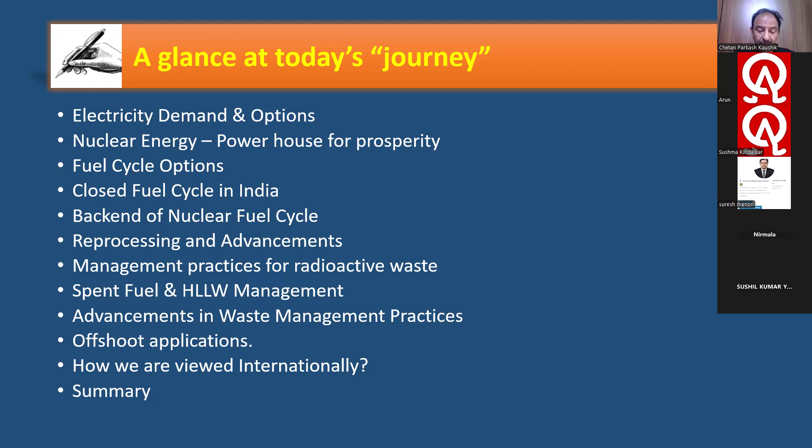I will also cover the important offshoot applications of this development, and more importantly, how this development—done only maybe a decade earlier—has led the international scientific community to view our country with respect to these developments. And then I may summarize.

If you look at an imaginary situation, looking at the world from the sky or from space, you will find that some parts of the Earth are brighter compared to others—maybe the USA, Europe, Japan, and to some extent India. What I'm talking about is basically per-person consumption of electricity, which is by and large a direct measure of the development index as a whole.

Even now, worldwide, we may be lucky enough to be staying in cities, but still a good number—13% of the world population, and even around 15% of the Indian population—has yet to see the benefits of electricity. This shows that electricity plays an important role in the sustainable development journey.

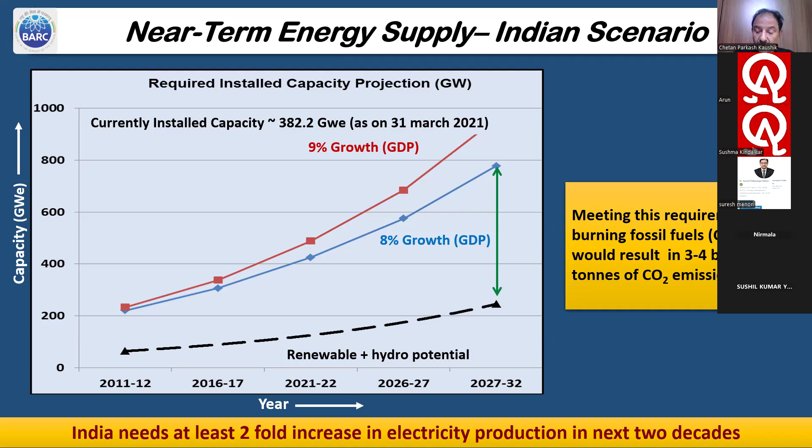What I'm essentially trying to say is that only renewable, only solar and hydro, will not be able to meet the ever increasing demands of electricity. Does this gap, shown by the green line, mean coal will continue to play an important role in meeting this requirement? If we have to bank on burning fossil fuels, not necessarily coal but even oil, it would essentially mean 3 to 4 billion tons of CO2 will again get pumped into the environment. So we have to think about how these things can be handled.

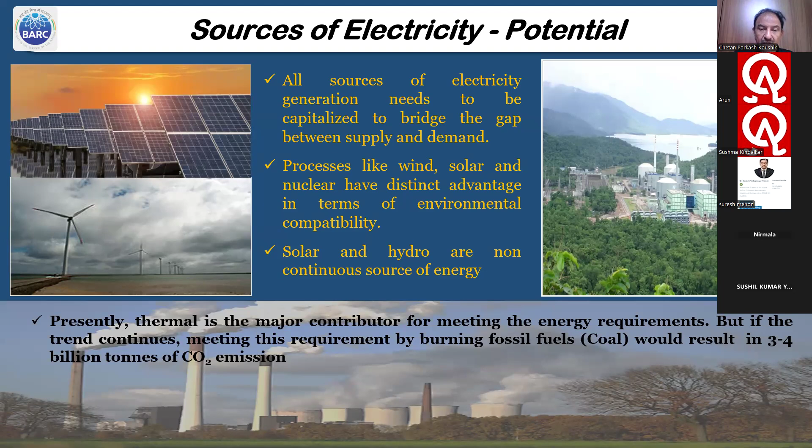Now if you look at the remaining sources, as I told you, solar is on the left-hand side, then I'm talking about the nuclear part, and at the bottom we are talking about coal. So the major contributor as of now is coal, and almost every now and then we've been having a good concentration of CO2 getting pumped into the atmosphere.

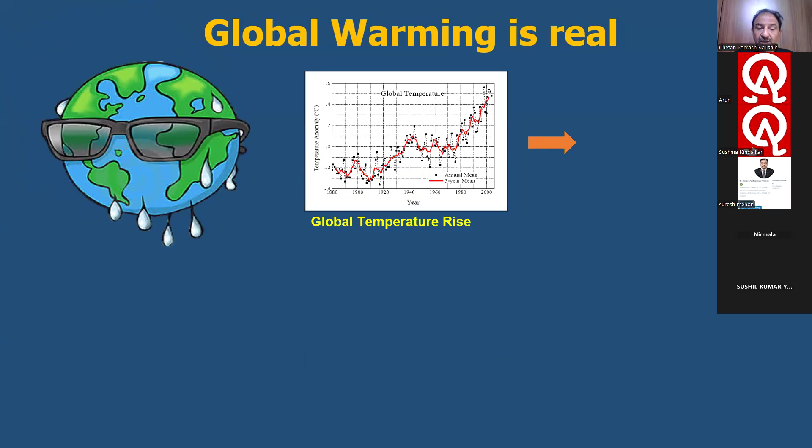So why are we so worried about CO2 getting pumped into the atmosphere because of global warming, and what does it mean? Is it only of academic interest, or are we able to see visible changes from this global warming? It is not only a virtual concern, rather it is now a real scenario, and it has started showing its signature in different ways. For example, floods in North India, typhoons in China, hurricanes like Dorian - there are many such examples, and essentially CO2 is playing an important role in warming the earth.

If you look at the first graph, global temperature, starting from the industrial revolution, maybe around 1900 onwards - earlier we had a green revolution based on crops, and then we started the green industrial revolution. At that time, we were banking only on coal. From 1900 to now, the graph clearly indicates there has been a steep rise of maybe around 1.5 degrees Celsius in the temperature of the earth.

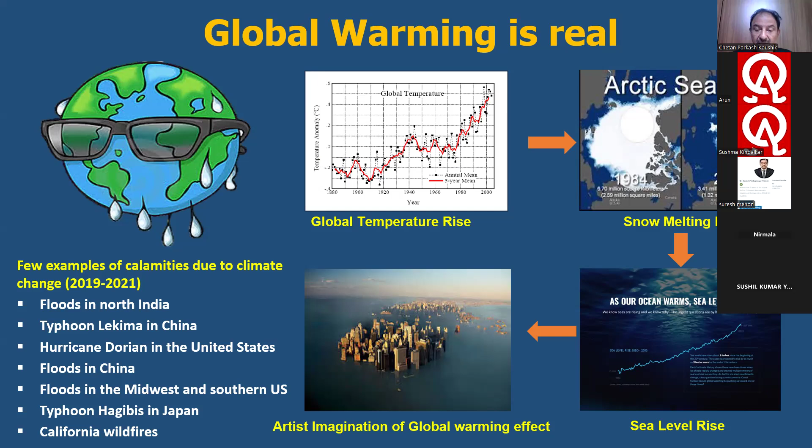Looking at it, the figure 1.5 may not seem that serious, but it has serious consequences, resulting in the melting of ice in glaciers, sea level changes, and sea levels rising up, which will eventually cause coastal cities and areas to get submerged in water.

Now, if you look at the air composition - nothing nuclear so far - it essentially contains nitrogen and oxygen. Nitrogen and oxygen together probably cover more than 90%. The remainder is only water vapor, carbon dioxide, and methane. The question then comes: when the bulk, more than 95% or 99%, is fine, why do we need to bother about the remaining 1%?

Is the presence of even 1% also a cause of concern? CO2 and methane, mainly CO2, are called greenhouse gases - why them and not others?

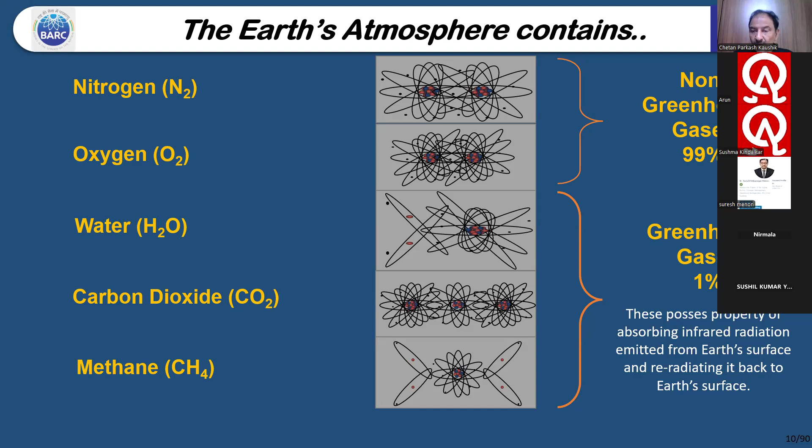If you look at the composition of CO2, this property of absorbing is important. We know that the sun emits different radiations of different energies, and energy and wavelength are the characteristic properties that define radiations.

Radiations of different energy range from ultraviolet to infrared. Nitrogen and oxygen are almost silent players when radiation comes, but CO2 absorbs the infrared radiation from the sun, because the energy of infrared radiation is sufficient to interact with CO2.

Now the question comes - why? It's still basic science, nothing nuclear. Why do nitrogen and oxygen remain silent with infrared radiation, why are they not absorbing it?

There has to be a change in dipole moment - this is again basic science. CO2 is IR active, meaning it interacts with infrared radiation. As a result, when radiation comes from the sun and gets absorbed, and again after reflecting from the earth when it goes back up, it again finds its friend CO2 and gets absorbed again. As a result, it warms the earth's temperature.

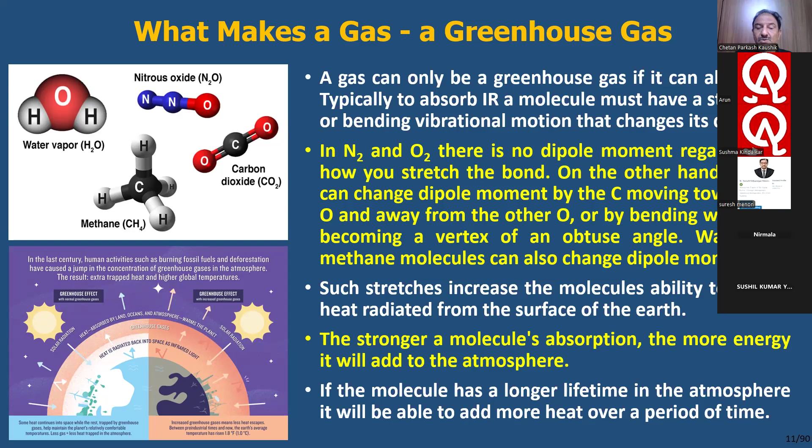Oxygen is almost not playing any role, neither is N2 or O2, but CO2, methane, and water vapor are able to react with infrared radiation and get involved in chemical changes. But N2 has no dipole moment, so it remains a silent player in this.

Now, the greenhouse gases cause global warming. Sun rays come and meet other constituents of air, but there are silent constituents like O2 and N2. The moment these radiations meet CO2, they get absorbed. And when the earth reflects them back, again they get absorbed because of the presence of CO2.

Around 1900, if you look at the data, the average concentration of CO2 was something around 150 to 200 ppm. If you look at current data from Google and others, we have touched around 400 ppm. Now, CO2 is important for a habitable planet.

Let's imagine a situation where CO2 was not there, where CO2 would have been zero. That would mean the temperature of the earth would have become minus 20 or so - meaning human civilization would not have existed. So CO2 is equally important.

But as our elders have told us, excess of everything is bad. So now 200 ppm has gone to 400 ppm, which has started showing its results. Modeling data predicts that if no serious attempt is made to stop this, the consequences will be even more serious in nature.

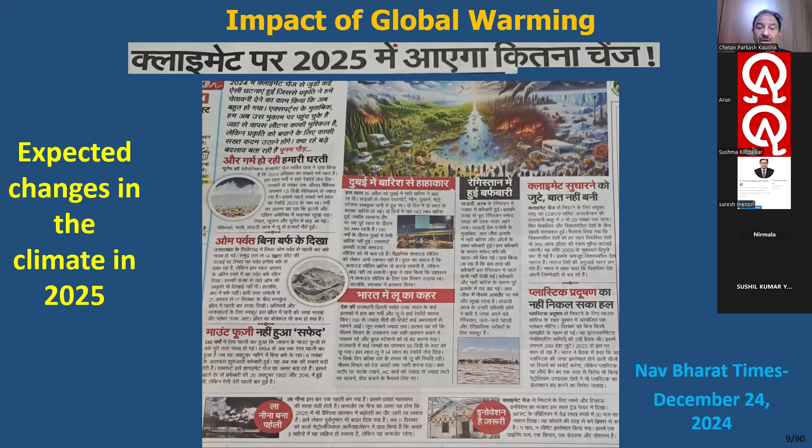That means scientific observation has sensitized the public and policy makers to look seriously at something. Look at a key reason why nuclear energy is a game changer in the fight against climate change: it has a low carbon footprint.

Now let's look at the footprint, starting with coal. If we use 1 kilowatt hour, 1 unit of electricity, we release around 820 grams of CO2 into the atmosphere. Then there's natural gas, solar, and nuclear, which has only around 12 grams. This shows nuclear has a minimal footprint, by and large equivalent to renewable energy options.

So the question comes, when we talk about nuclear, what do we mean, what do we understand? Because one strange or unique thing happened with nuclear that hasn't happened with anything else: when the process of nuclear fission was invented in 1939 by Strassmann and Hahn, the scientists, they started exploring this.

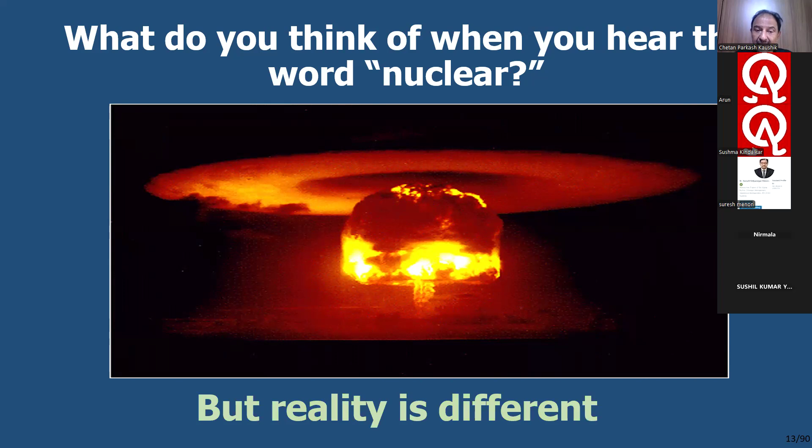The truth is different. There have been conferences of parties because scientists have done their job. They sensitized policymakers about CO2 increasing in the atmosphere, and that if nothing is done seriously, it will have serious consequences.

Because of that, policymakers around the globe have realized the sensitivity and seriousness of this, and a worldwide yearly conference is held, because these gases and CO2 do not know any boundary. Hindustan, Pakistan, USA, our God has given the same sky to all of us. So globally, it has to be addressed.

Because of that, and they meet yearly, that's what I was trying to tell you, that our honorable Prime Minister has given a commitment that we'll have net zero carbon emissions by 2070, together for our planet.

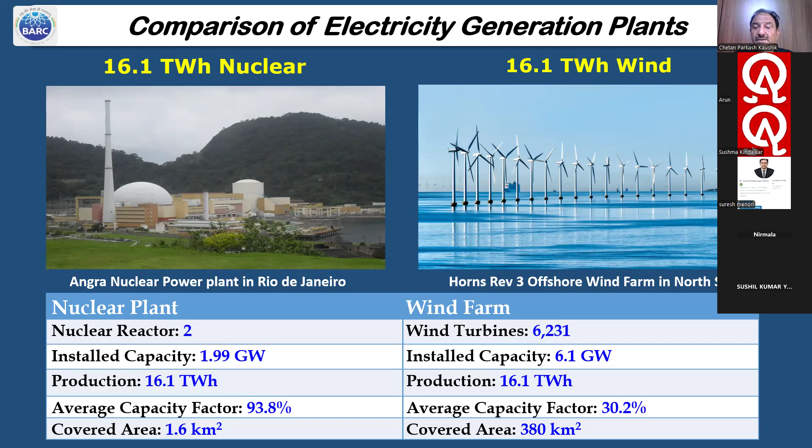So this area looks to be very, very high.

Now, nuclear is playing a key role as of now, an indispensable role in health sector, food, water, environment, national security, technology development, and industry. I can give examples for all, and some of these I will cover during the course of the presentation.

Now let's look at how this atom can become a source of energy. This goes back to a paper published, if my memory is right, in 1905, by one of our scientists, the father of this field, Albert Einstein, where he indicated E equals mc square. That paper, published in 1905, becomes the basis of nuclear energy, and it indicated that mass and energy are interconvertible.

To give an example so one can really appreciate this powerhouse of energy: if you look at maybe 2 bundles of uranium fuel, 27 kg each, the energy equivalent would require a huge amount of coal, equivalent to 700 tons. This itself reflects what we mean by the powerhouse of energy.

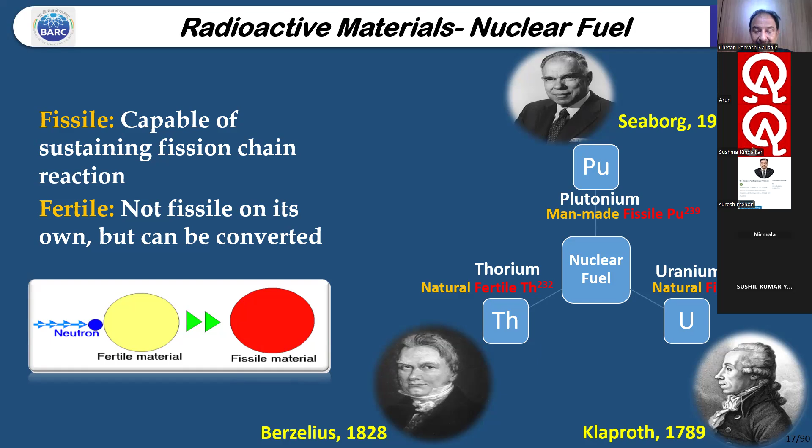Coming back to the Indian part, we made Apsara, the name of the reactor, in 1956, and we were first in Asia at that time. This was the vision of Dr. Homi Jahangir Bhabha, who is known as the architect of the nuclear energy program in our country. He is the founder of India's nuclear program and made the first reactor operational in 1956, being first in Asia, because he knew nuclear would be important not only for electricity production with very low carbon emission, but also for health, food, cutting edge science and technology, and national security.

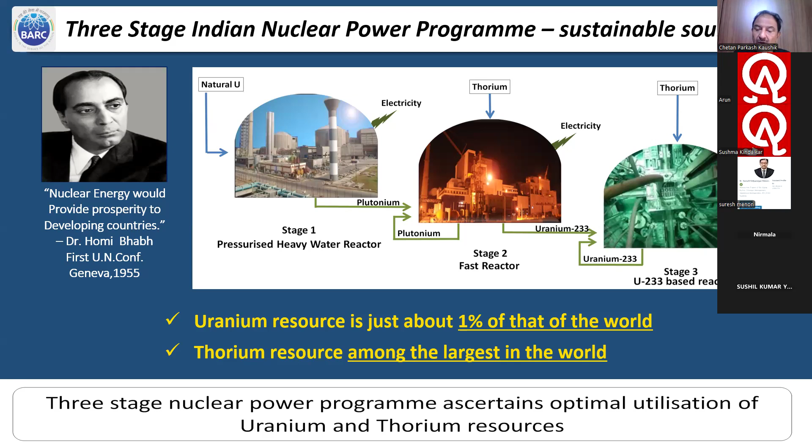During fission, what happens is a heavy nucleus gets split up into two or more smaller nuclei, plus a huge amount of energy, plus additional neutrons. This huge energy has to be extracted, so here we use water to extract that energy. Water gets converted into steam, and we increase the pressure so that the boiling point of water can be increased - again, we are playing with basic science.

So, pressure cooker principle - why? Compared to a normal conventional pressure cooker, where boiling temperature of water is around 130 degrees Celsius, here it's much more because pressure is higher, and it's the high pressure steam which rotates the turbine of the generator, and that's how electricity is produced.

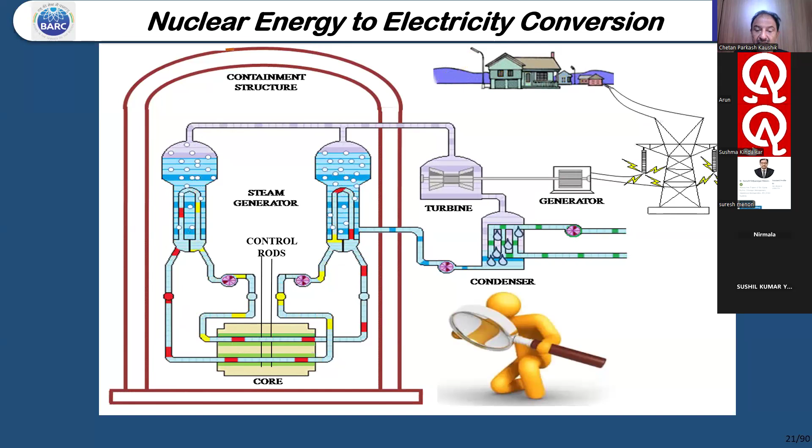This is a simplified part, but this also shows the safety components, and we have what is called defense in depth, or multiple barriers.

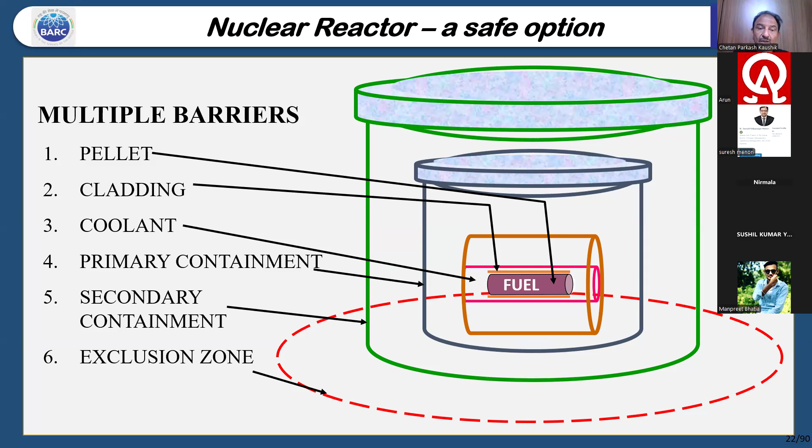Initially, there will be a reactor. You can talk about fuel pellet, and the fuel where it is written. It is a very strong, chemically stable refractory material we call zircaloy, an alloy of zirconium and tin. Then you'll have a cladding material, coolant, primary containment, secondary containment, and then there is the exclusion zone. What I'm trying to tell is we have a defense in depth, a multi-barrier concept to ensure the safety of environment as well as human civilization, while extracting the benefit of science, extracting the energy of the atom. At the same time, we want to make sure that it remains safe.

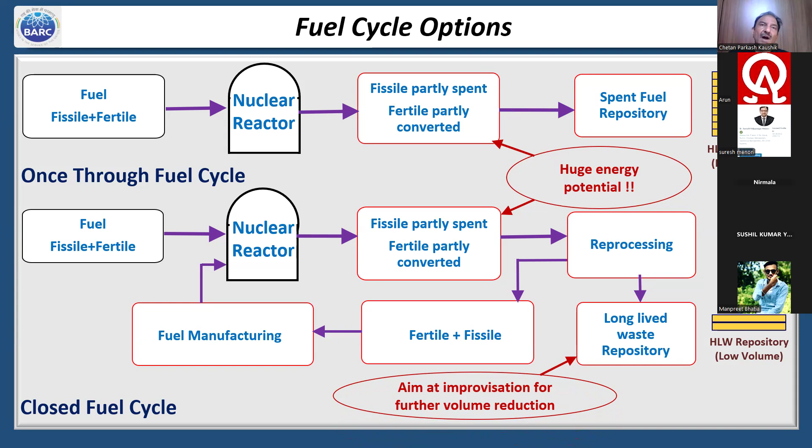Now we talk about the fuel options. All over the world, there have been two types of fuel options. One, we say once-through fuel cycle, where the fuel is taken, put into a reactor, extract the energy, and the spent fuel, which contains plutonium and a balanced amount of uranium-235, they just store it. Worldwide, they have a planning to put it underground, maybe something around 500 to 800 meters below the earth. They call this a geological disposal facility.

So it is being reprocessed in India to recover plutonium which got formed in the reactor, and then the remaining components also are being reused for different applications. So India adopted a closed fuel cycle. Again, I want to repeat: take a fresh fuel, put into the reactor, then the spent fuel. Now the fresh fuel I can handle in my bare hand, no problem.

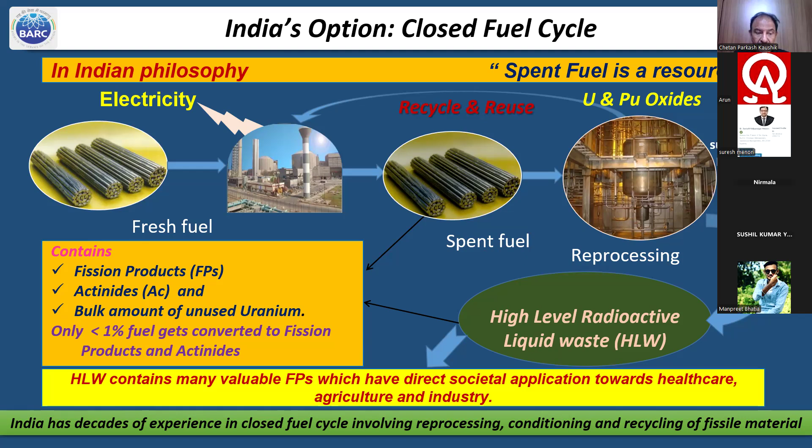So when you say front end and back end, that means there has to be some front end also. Front end starts right from taking uranium from Mother Earth, converting and dressing it in a fuel form, then putting a clad and putting it into a reactor. So that part comes as the front end part. But the back end means once it comes out from the nuclear reactor, when it gets consumed, and that time India has gone for a closed fuel cycle.

So it makes two components. One is the reprocessing, where plutonium and uranium are recovered for reuse — recycle and reuse. The reasons have been many: conservation of natural resources, optimization of waste management system, minimization of environmental impact, and most important, which has kept our country in the driver's seat, that fuel cycle components like cesium-137, strontium-90, yttrium-90, ruthenium-106 were once upon a time waste components, and we all, including globally, worried about disposing of them again into Mother Earth.

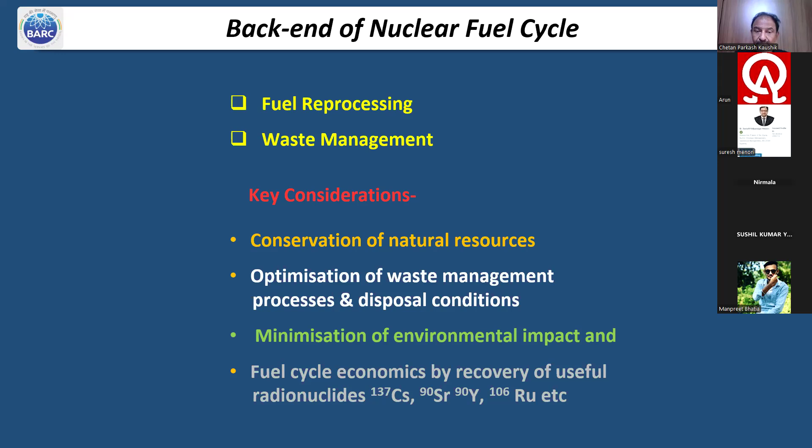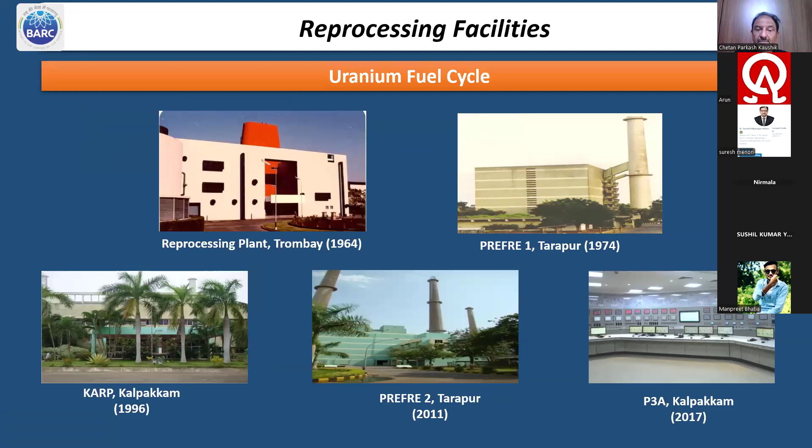So this is a reprocessing methodology. I may just skip details because of the complications or complex nature of the process. These are some examples where we have a reprocessing plant in the country, and this is the process of how we reprocess the fuel. It is initially cut, the zircaloy is cut, it is dissolved, and then we play with the valencies of uranium and plutonium, and then go for what is called a solvent extraction system.

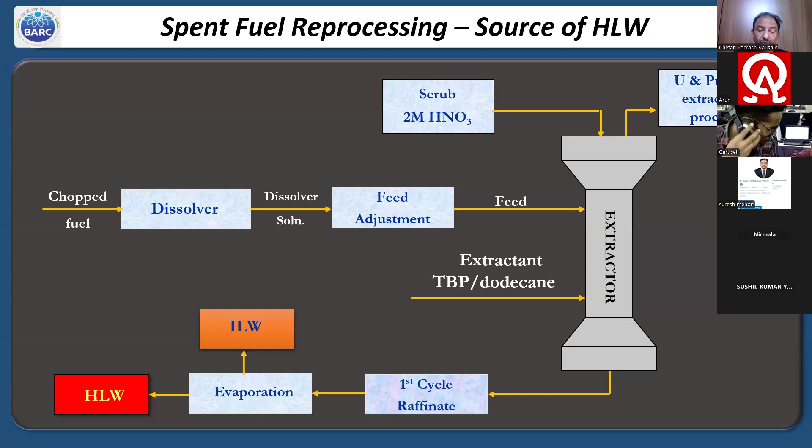What I'm trying to tell you is that it's an innovative technology where only uranium and plutonium are taken out, keeping the remainder. Then uranium and Pu are separated from each other and used as fuel for future reactors.

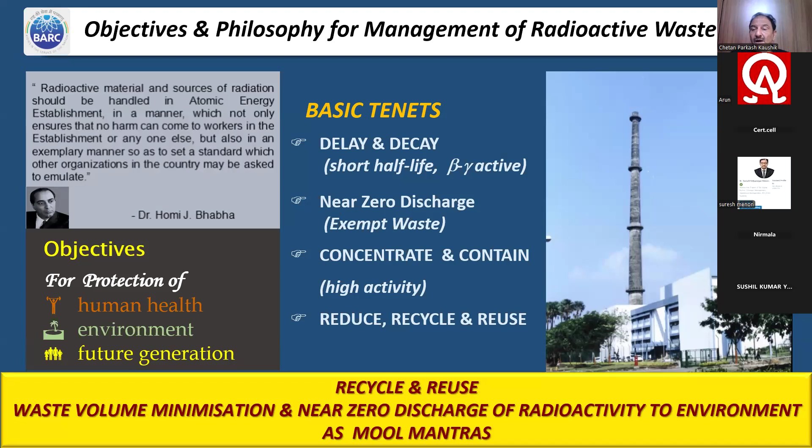So from Bhabha, right from the inception of the nuclear energy program in the country, most important attention has been given to radioactive waste - recycle and reuse, number one, and zero discharge of radioactivity to the environment has been the mool mantra right from Bhabha, who has been the architect of the nuclear energy program in the country. So again, uranium and plutonium have been taken out from reprocessing.

Another plant is the waste management plant, where there were two options. One is to convert it into glass, that is immobilize it, and then dispose it off. But the innovation has gone further - is it possible to recover them individually, like cesium-137, strontium-90, ruthenium-106?

Similarly, for TRU, that is transuranics - neptunium, americium, curium - these are all called actinides. You might remember from our high school periodic table, at the bottom there are two lines. One is called lanthanides, one is called actinides.

So americium is an alpha emitter. You may know the radiations are either alpha, beta, or gamma - they have different properties and nature. Americium-241, when I say 241, that's nothing but the mass number, which is the sum of protons plus neutrons in the nucleus. And this americium-241 is an alpha emitter.

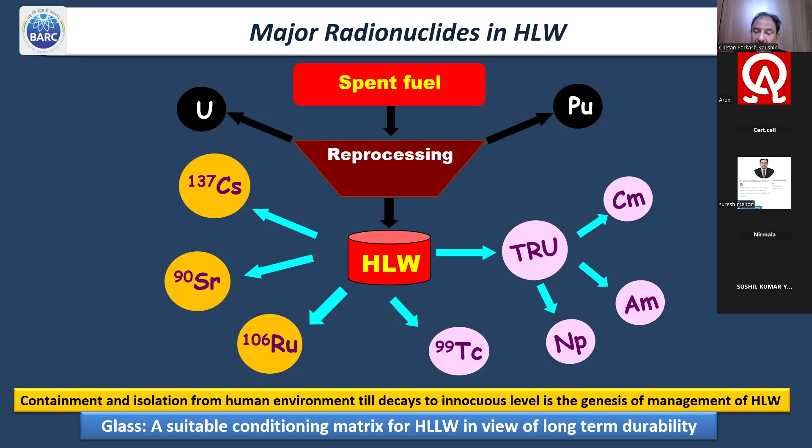And the 12th class principle, normally we read what is called the Seebeck effect. So we utilize this, and americium-241 is equally important.

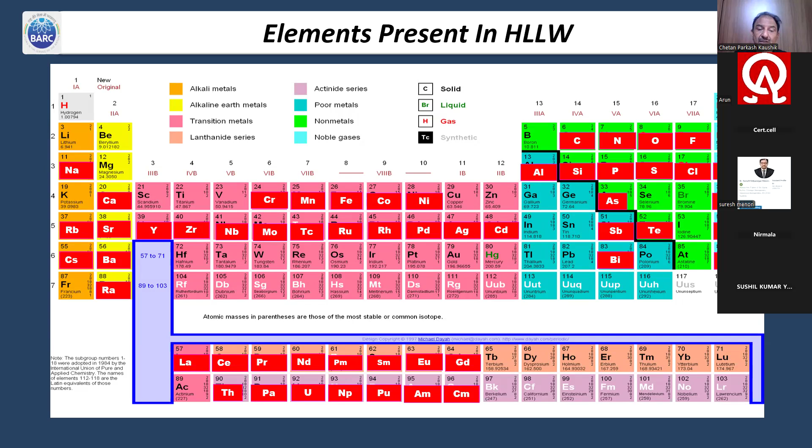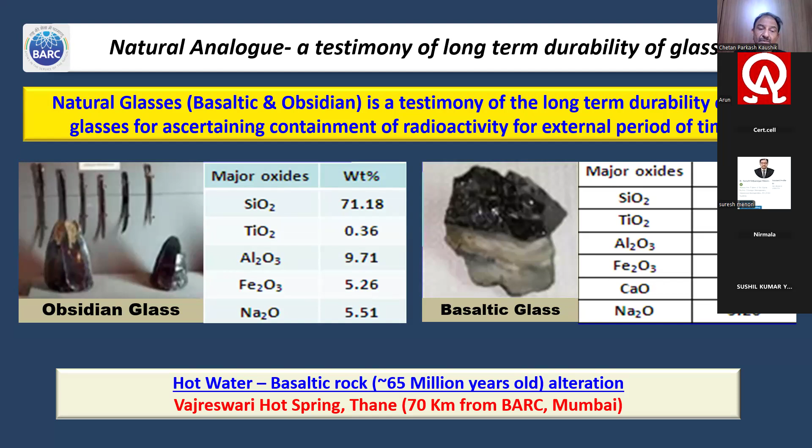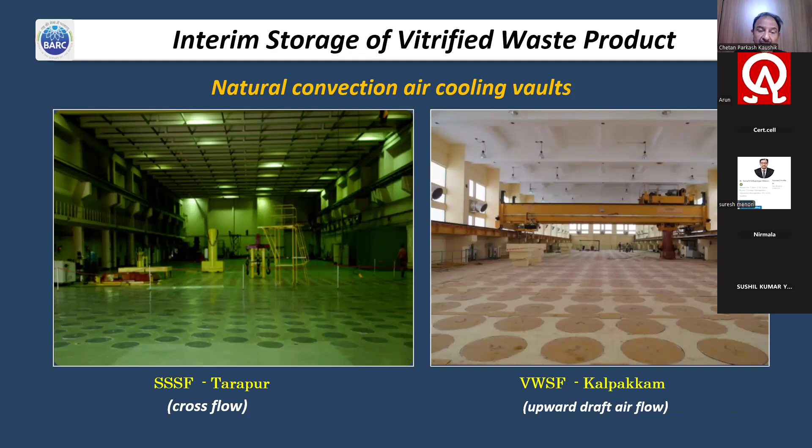These are storage facilities where after the waste is put, it is converted into glass. The radionuclides generate heat, so we have to dissipate it. They are stored for around 30 years so that heat is dissipated, and when they decay to an innocuous level, meaning activity becomes very low, they are disposed of around 500 meters below the earth. This is the international level practice for disposal of waste.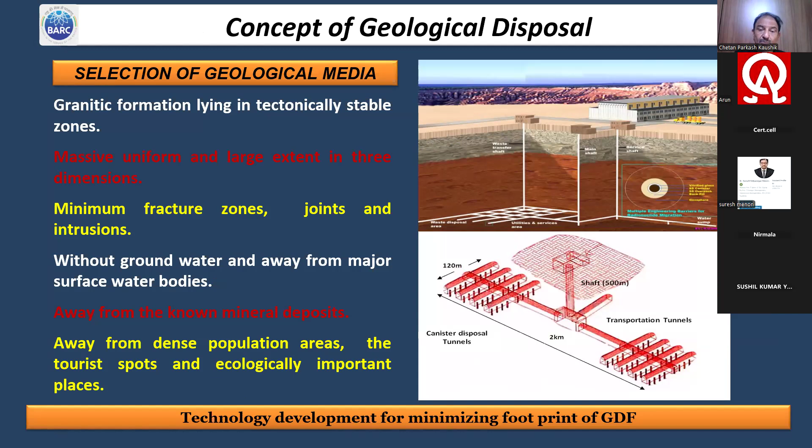But now look at the scenario of India, and what India has done which has put it into the leader's scale. I'm intentionally skipping this part. Look at this slide, why and what India did to get into the driver's seat.

See, if the waste is left as it is, with nothing done to it, the radioactivity will take more than 1 lakh years to come up to the natural uranium level. I mention natural uranium because it already exists in nature, and human civilization has been existing alongside it. So if the waste after the reactor takes such a long time for activity to come down to the level of natural uranium, one cannot really wait that long. You have to remove the long-lived components.

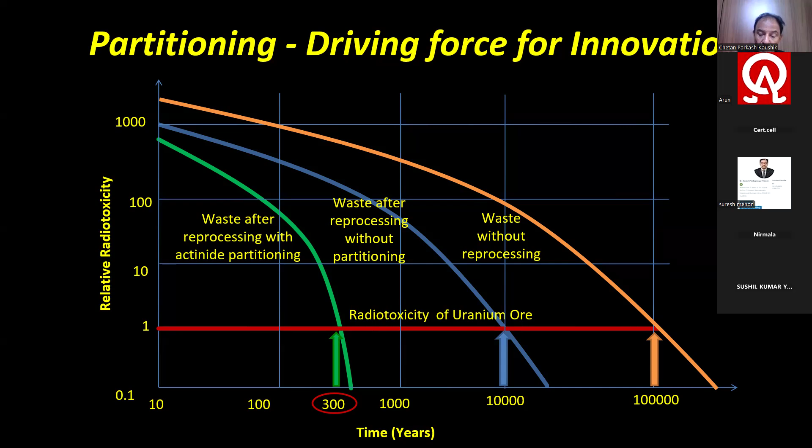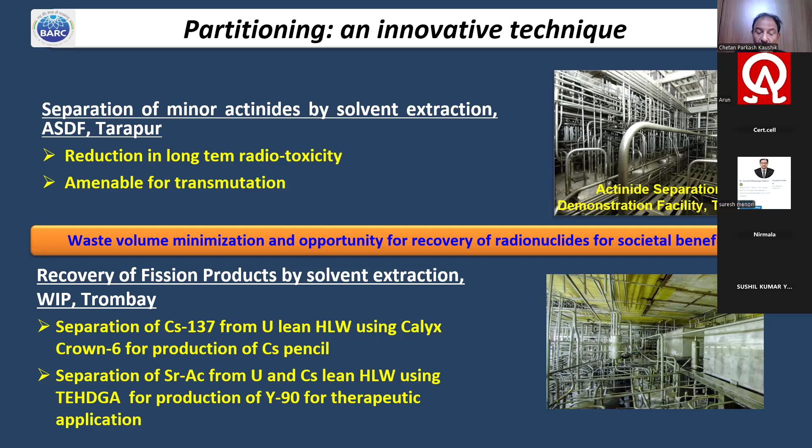This is what was done, and here you see the picture in Trombay. We recovered actinides, americium-241 part, americium, cesium-137, and strontium. Those components which were considered as waste, needing to be converted into glass and then stored and taken for disposal, are now recovered and utilized for different societal applications.

And how to recover? It has to be selectively recovered, and that calls for chemistry and engineering development. So we work in a development, demonstration, and deployment mode.

So what I'm trying to tell you is that waste is not waste, it is a resource material. Cesium-137 and strontium-90, if recovered, make up 90% of the radioactivity of the waste. And ruthenium is again 1 to 2% of the radioactivity. So if all of these have been recovered in India, they have been deployed for different societal applications.

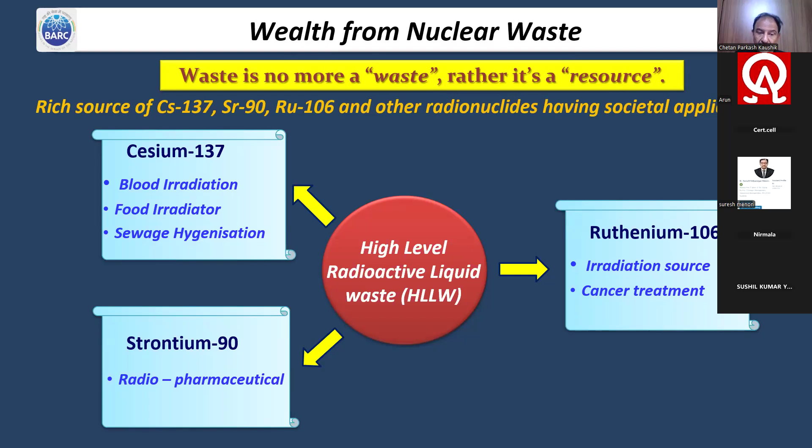For example, we recovered cesium-137 from waste, and this was converted into a glass pencil, which is being used as a blood irradiator. As of now, more than 20 hospitals use this cesium-137, recovered from waste and converted into a cesium glass pencil, as a blood irradiator.

And you know where this blood irradiator is used? For transfusion, if an immunodeficient patient has to be given blood, that blood needs to be made free from all harmful components. So radiation is given so that all harmful organisms are killed, and that is done by blood irradiators. Our country was first in the world where cesium-137, a component of waste, was recovered in large quantity and deployed in a non-dispersible form for various societal applications.

Similarly, ruthenium-106, again one of the components of radioactive waste, was recovered and is now being used for eye cancer treatment. Let me tell you, there was only one company in the world, Messrs. BEBIG, Germany, a radio pharmaceutical company, that was selling this to all the remaining parts of the world at a very heavy cost, keeping eye cancer treatment away from the common man in India.

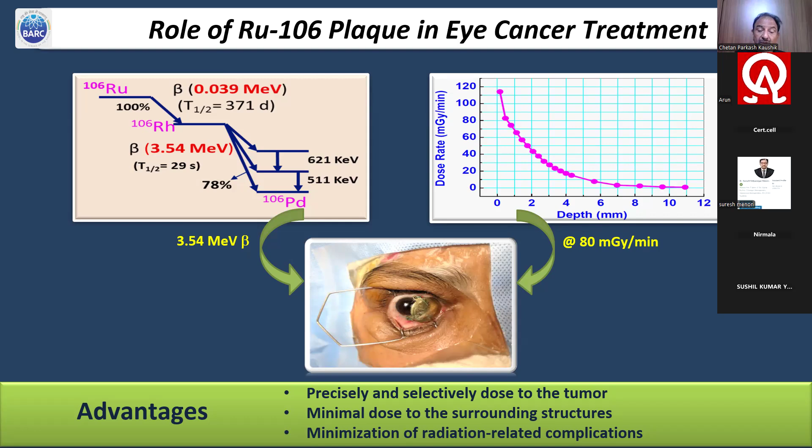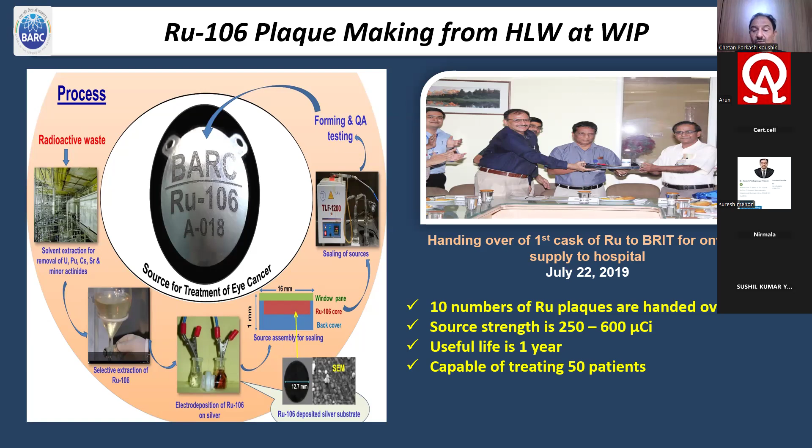On the left side, I was director there. When we gave the first lot in July 2019 for ruthenium after recovering it from waste, we look at this example taken from one of the Sankara Eye Hospitals in Bangalore, showing how eye cancer treatment is done using ruthenium, a waste component.

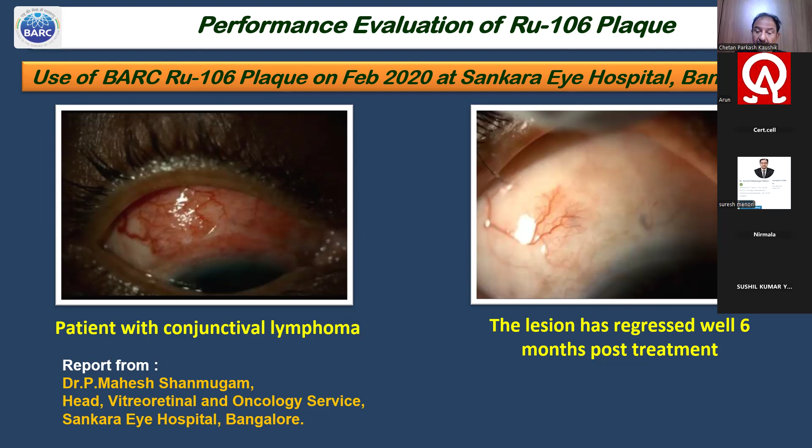The beta energy in this case: ruthenium-106 decays to rhodium-106, which has a beta energy of 3.5 MeV, and beta energy being short range, we wanted to kill only the cancerous cells without destroying the healthy cells. So we utilize the beta energy coming from rhodium-106, and the cancer cells are directly killed or destroyed, as shown in the right-hand side picture.

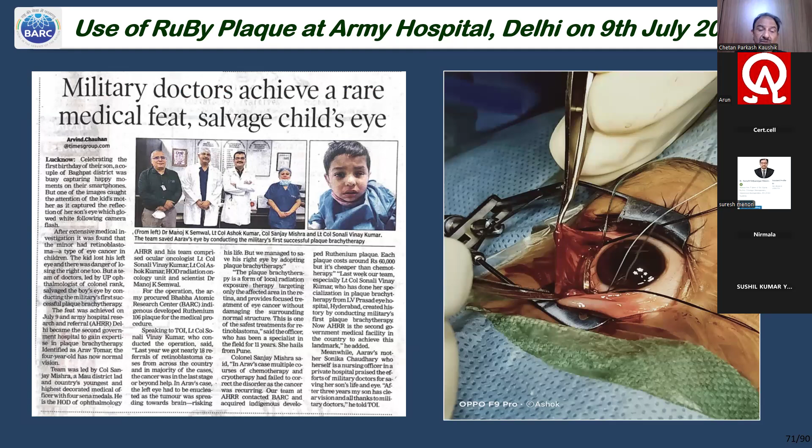On 9 July, at the Army Hospital in Delhi, a poor child had eye cancer treatment using the BARC-recovered ruthenium from waste. That plaque was used and the child's vision was salvaged. This is the certificate given by AIIMS Delhi stating that what they previously imported, this is as good as or even better. Following the path of Atmanirbhar Bharat, we have a 1 minute video clip showing the same.

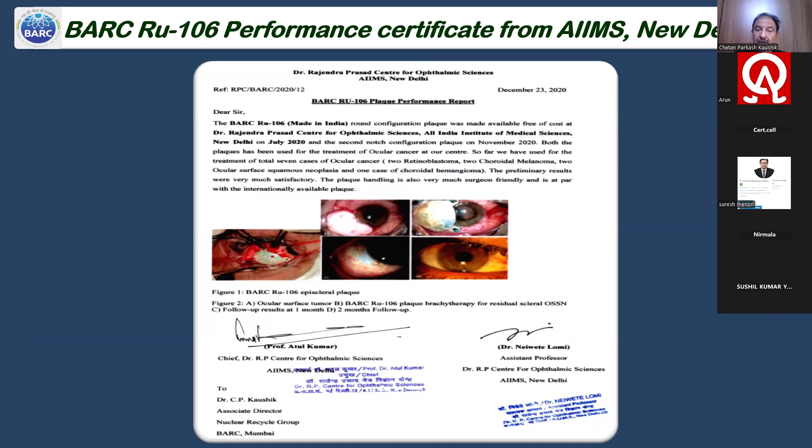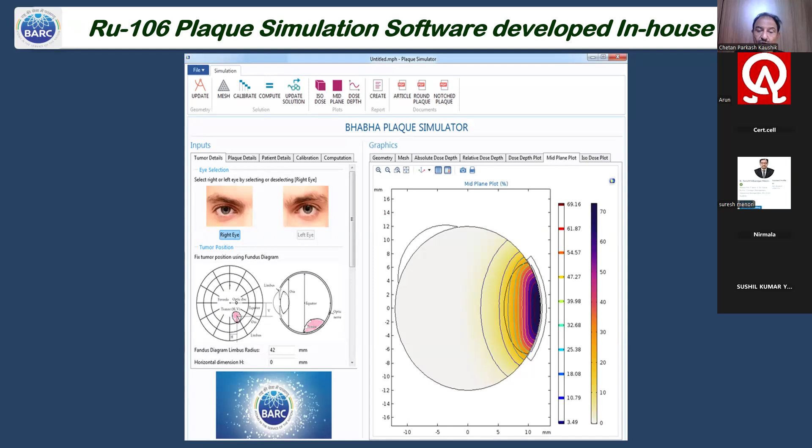We made a software program so that doctors can see, depending on the magnitude or severity of the tumor, how much time the radiation has to be applied to the eye to ensure all tumors are eliminated. Now the video clip, for 1 minute.

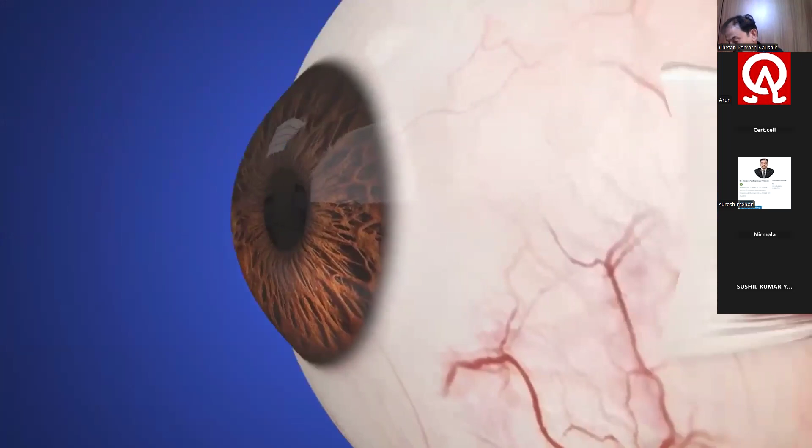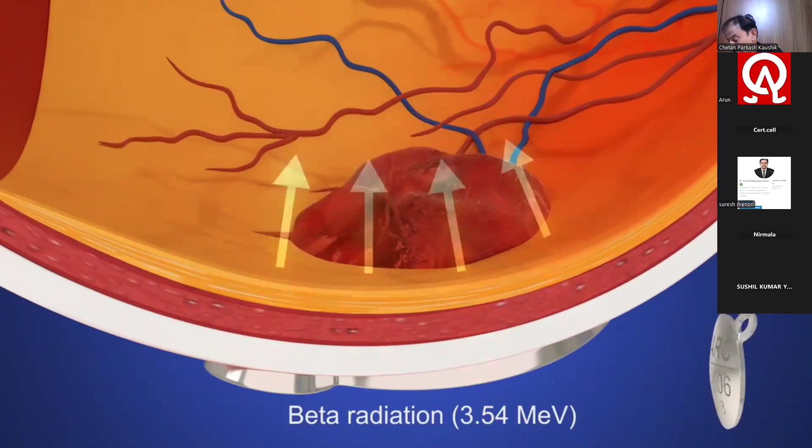Bhabha Atomic Research Center, the premier R&D center of DAE, is engaged in developing technologies using radiation for healthcare applications and treatment of cancer. BARC has indigenously developed ruthenium brachytherapy (RUBY) plaques for eye cancer treatment. Ruthenium brachytherapy is being used globally for treatment of eye cancer. In this treatment, a ruthenium plaque is placed on top of the tumor. It delivers selective radiation dose to the tumor without damaging the healthy tissues of the eye. This treatment modality is safe and has a very good track record of vision recovery and eye salvage.

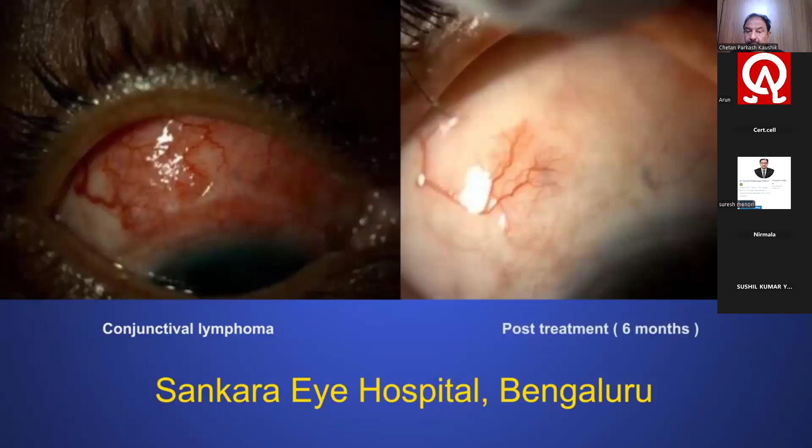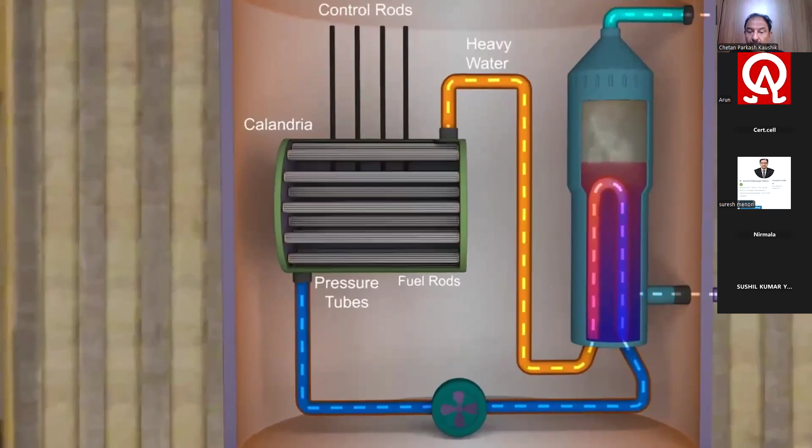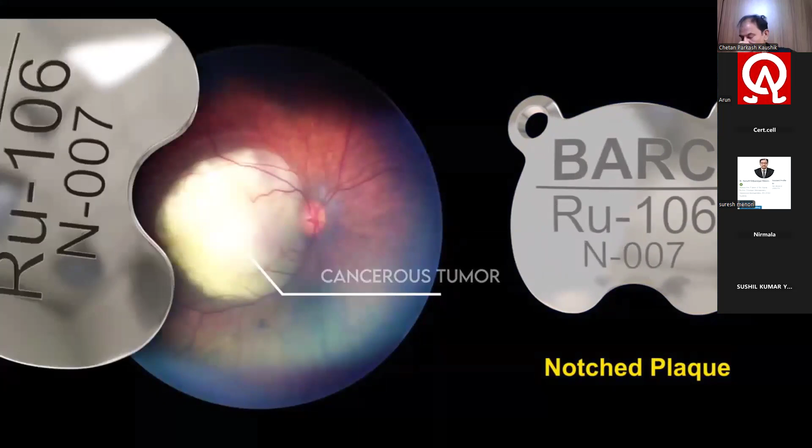Ruthenium plaque contains ruthenium-106 radioisotope. It is produced in a nuclear reactor by fission of uranium-235. This fission byproduct from spent fuel is harvested in its purest form using a series of separation processes. The recovered ruthenium is further electro-deposited on a silver disc, which is sealed and formed to produce the ruthenium plaque. Ruthenium plaques of round and notched configurations are being produced for the treatment of eye cancers. The notched configuration is suitable for treatment of eye cancers located adjacent to the optic nerve.

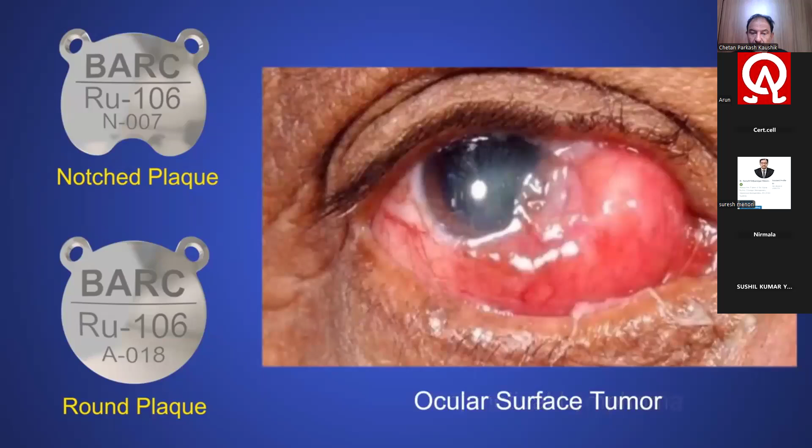The notched and round plaques are used for treating eye cancer like uveal melanoma, conjunctival lymphoma, ocular surface tumors, retinoblastoma, etc. Complementing the Ru-106 plaques, BARC has also developed plaque simulation software to assist doctors with optimal treatment planning. The software provides an easy-to-use interface for calibration and dose rate distribution of the Ru-106 plaques. It predicts treatment duration and dose received by other healthy parts of the eye.

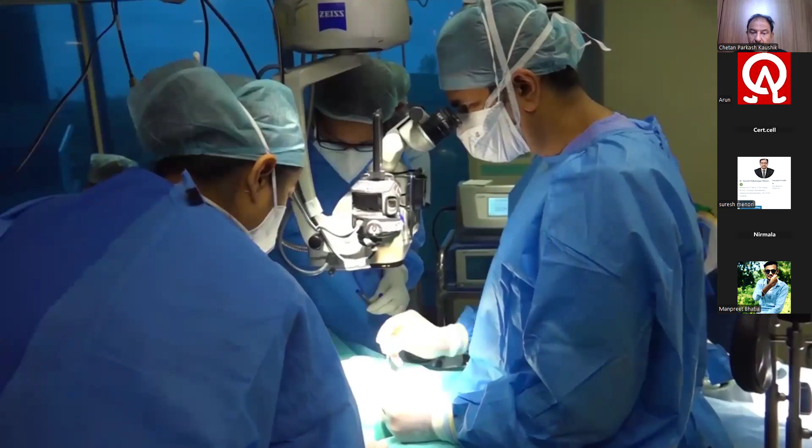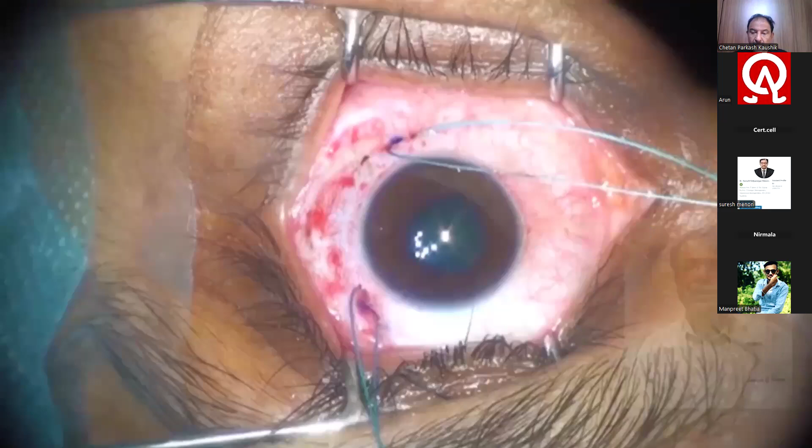Ruthenium plaques are being used for eye cancer treatment at several hospitals in India, including Center for Sight Hospital, Hyderabad, RP Center AIIMS Delhi, Sankara Eye Hospital Bengaluru, Army Hospital Delhi, Hinduja Hospital Mumbai, and Fortis Hospital Gurugram, Haryana. More and more hospitals are progressively adopting ruthenium plaques for better and cost-effective treatment of eye cancer. These plaques have gained the trust of doctors and patients alike. Development of an indigenous ruthenium plaque by BARC will really revolutionize the management of eye cancers in India and this part of the world.

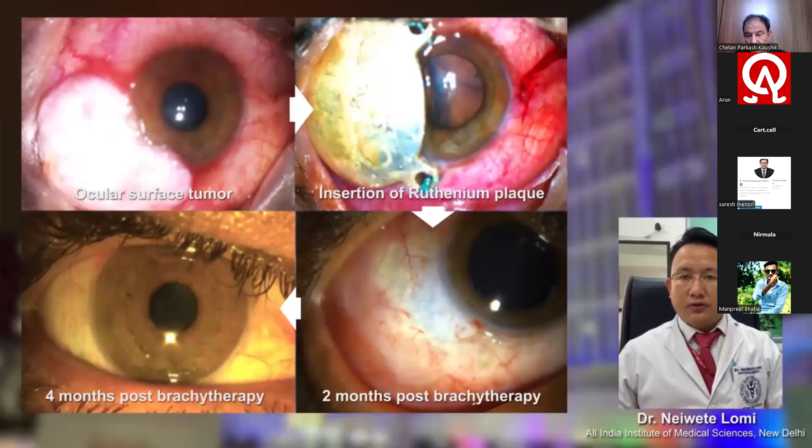We at Dr. RP Center, All India Institute of Medical Sciences, New Delhi, have been using this BARC Ruthenium-106 ocular plaque for the past 1 year. The results are very satisfying and encouraging. The plaque handling is very much at par with the internationally available Ruthenium-106 plaque.

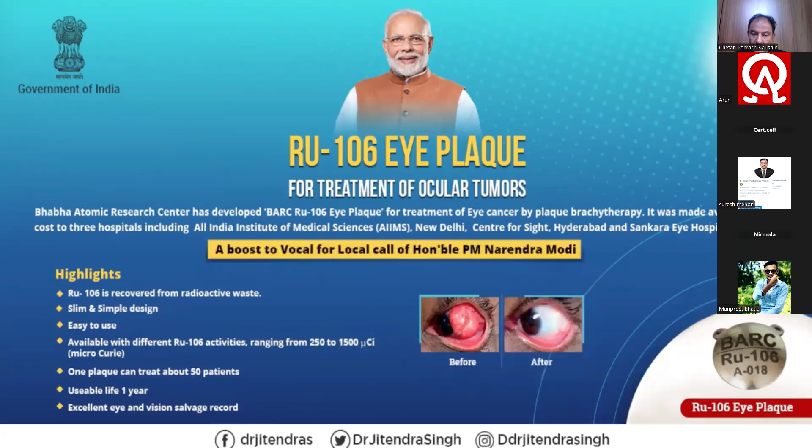BARC is now developing a pediatric plaque for treatment of retinoblastoma and a crescent moon plaque for treatment of cancer near the cornea. Ruthenium plaques are available through the Board of Radiation and Isotope Technology. Indigenous development of ruthenium plaques and the plaque simulator are major breakthroughs in the area of Atmanirbhar healthcare, providing affordable treatment to eye cancer patients in India.

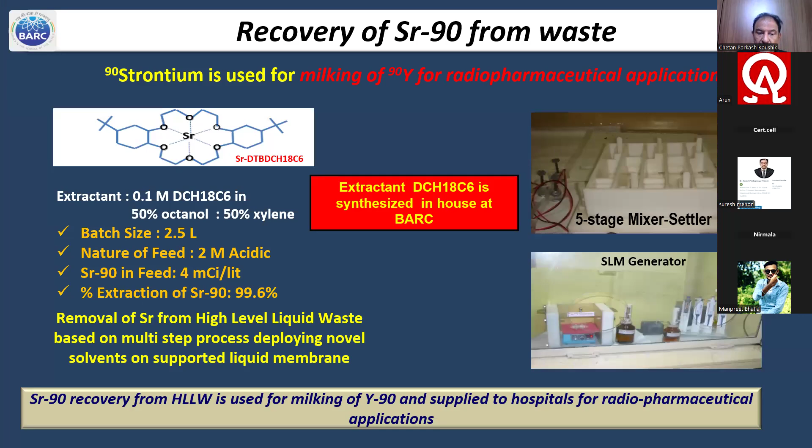So we have seen how this is recovered and being used. Similarly, strontium-90 is also being recovered and used for therapeutic applications. Now, if you remove the useful components, the volume of waste becomes very, very small. So that means it has multiple advantages.

Hindi mein bolte hain, aam ke aam gutliyon ke daam. Extract the energy, produce electricity, and what becomes waste becomes input for the other process. So that's how, as I was saying, it is circular. It gives birth to a circular economy process.

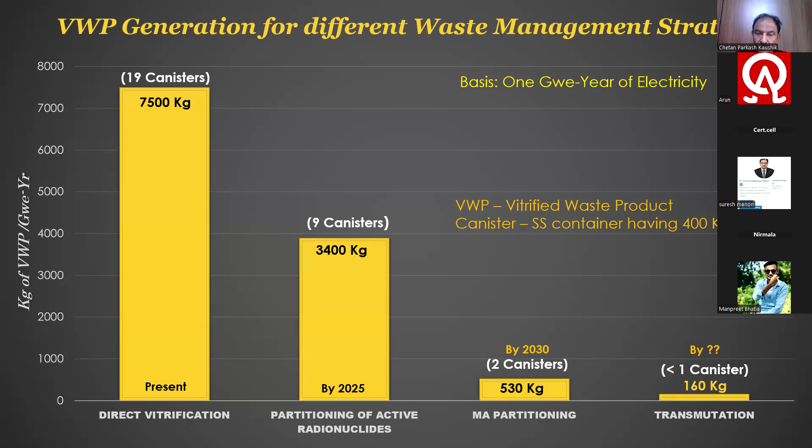So the impact of partitioning, as I'm saying, is the volume of waste becomes very less. The conclusion now may be that this will considerably cut down the requirement of geological disposal facility, that means going to 500-meter depth of the earth to dispose of all the waste. The benefit of science should be taken today. Why should future generations need to worry about it? That means we have to make sure there should not be any disposal facilities needed, and the solid radioactive waste has to become a reactant, an input for the other process. That's how the circular economy comes into picture, and it also makes the overall process economical.

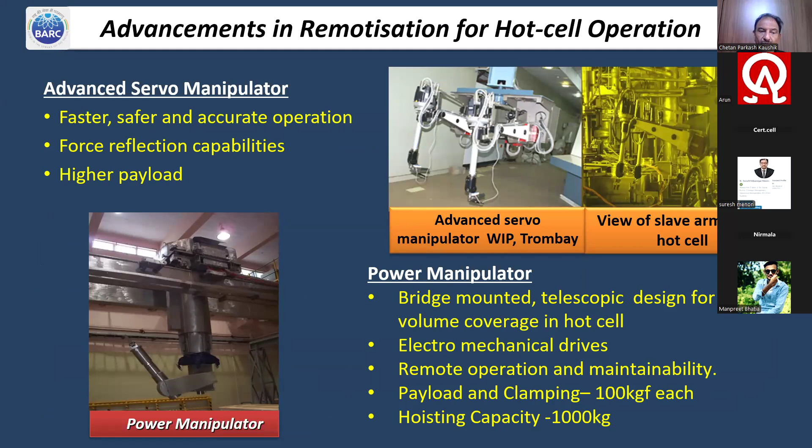This is showing a similar thing, generation of... I think this is more technical in nature. This is what is normally used in hot cells, so that man need not go near the radiation. Robots and all are being used. The intention is that all the required advanced equipment is being used for ensuring safe and secure working.

We have near zero discharge of radioactivity to the environment. We use well-developed processes so that the discharge of radioactivity is zero. That is what is very important for us.

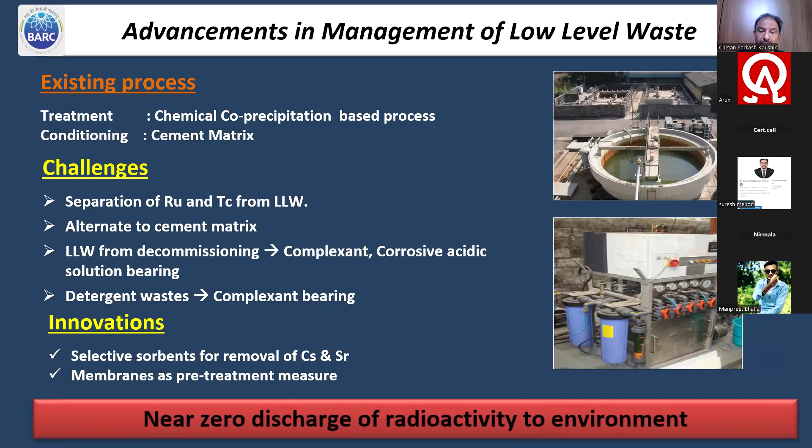But let me tell you, even on your forehead, if I put a sensitive radioactive measurement counter on your head, it will show presence of radioactivity. You know why? Because we all take tea, we all take milk, so potassium-40 comes along with the calcium, and potassium-40 is present in our body. Similarly, radiation also comes from the earth. That means human beings have been existing in an environment of radiation not just from now, but right from mother earth itself. The question is the quantity of the radiation.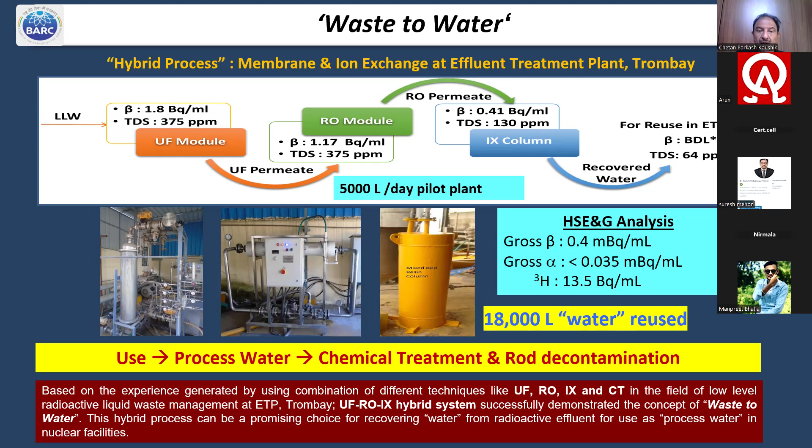This shows that we use advanced chemical processes - ultra filtration modules, reverse osmosis modules, ion exchange modules - and the processed water, when wastewater comes in, is being reused again. Maybe not all, but for low level radioactive waste, the waste gets converted to water, and that water is reused for the plant, which helps minimize water requirement as well.

So this is again how we handle low level waste. Again, the volume is minimized. We use plasma as a source, we use resorcinol formaldehyde, and very small amounts of waste are disposed into nuclear institutional control.

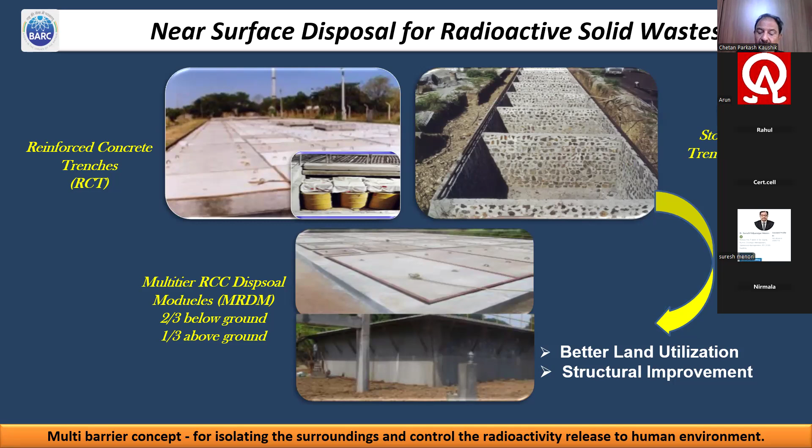And they are decaying. The main difference between chemical waste and nuclear waste is that chemical waste, for example potassium cyanide, remains equally toxic as a function of time - whether you consume it today or after 100 years, the result is the same. But in case of radioactive waste, since it's decaying, today it's waste, tomorrow it may not be. Because of that decay, it becomes an innocuous level. So the short-lived radionuclides are disposed in specially engineered modules within the institutions of DAE, and within a given time period they decay to innocuous levels.

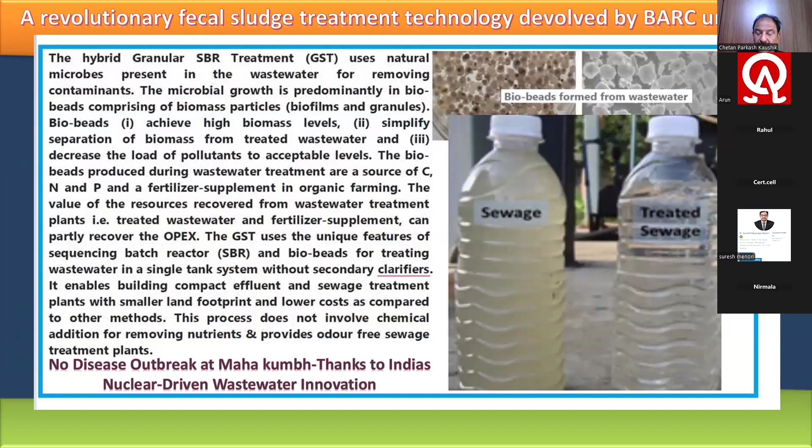Now these are just examples of the engineered structures being used. Now let's look at the offshoot applications - sewage treatment done by radiation is another important application. Now, whatever we have done for development, we also look at whether it has any application in the non-nuclear field as well.

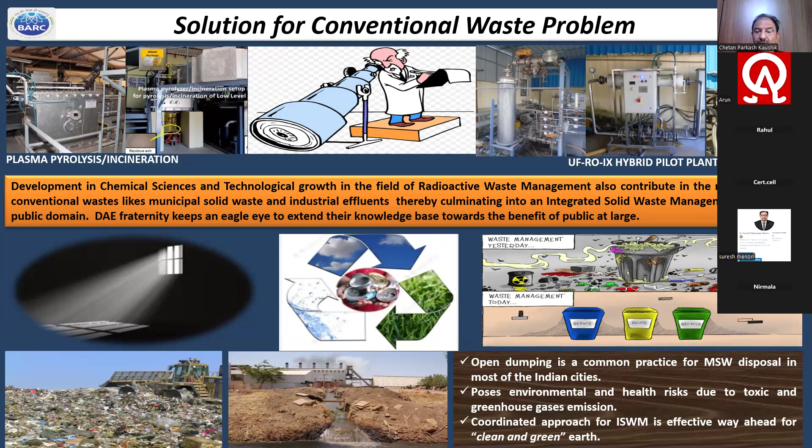If you look at municipal solid waste and liquid waste, I can give an example. This municipal solid waste situation has been the story of all our cities in the country. Although all governments have been trying to have religious adherence to segregation, I would ask all listeners - are we really doing it religiously? Probably there is good scope to improve it further. This picture is from Gazipur in Delhi - almost the heap is close to the height of Qutub Minar, with open dumping and then open burning and all.

I would like to tell you that if you openly burn waste, there are a lot of poisonous gases, which even at very low concentrations below threshold limit values, are cancerous. They go into the atmosphere. So these need to be treated.

How do we do this? We have tried what is called plasma gasification. Every gram of municipal solid waste, be it polythene bags, is non-degradable, but they have some calorific value, maybe around 20 to 30 calories per gram, so they can be suitably utilized and become a heat source for heating water and other applications. The waste can also be managed, because otherwise cows and others end up eating it, and it's non-degradable, making our soil infertile.

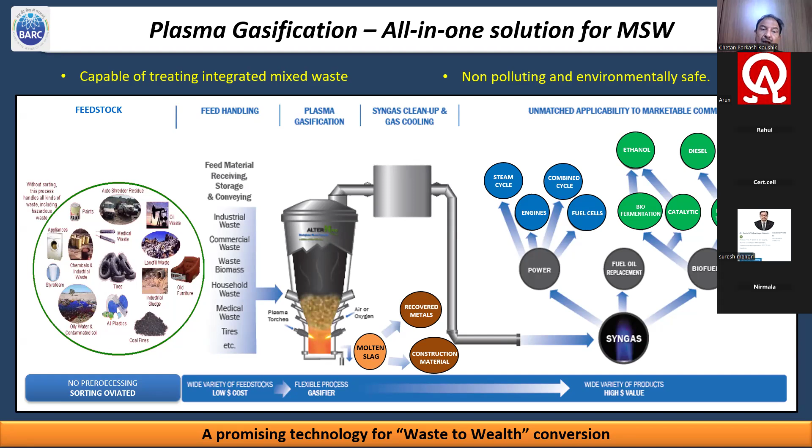So plasma gasification is one important part being used in BARC, and now at Tarapur we are trying to make a small model for municipal solid waste so that later on the states can also take a look. Presently it may not be economical, but when mobile phones initially came, they too were not economical. So when things are utilized on a mass scale, economics will reappear. But first we have to worry about the ever-increasing municipal solid waste in the country.

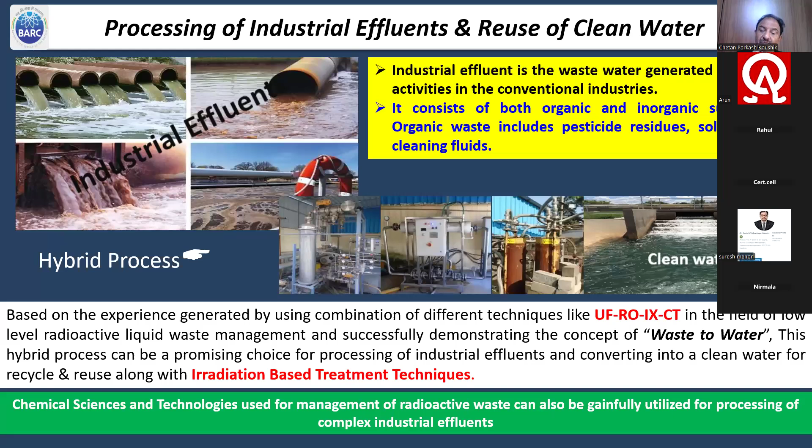Similarly, look at effluents. Take Surat or any city, the effluents are discharged and the water becomes highly polluted. Again, the hybrid process we use for nuclear liquid waste management can convert this into clean water as well. So this is an offshoot application.

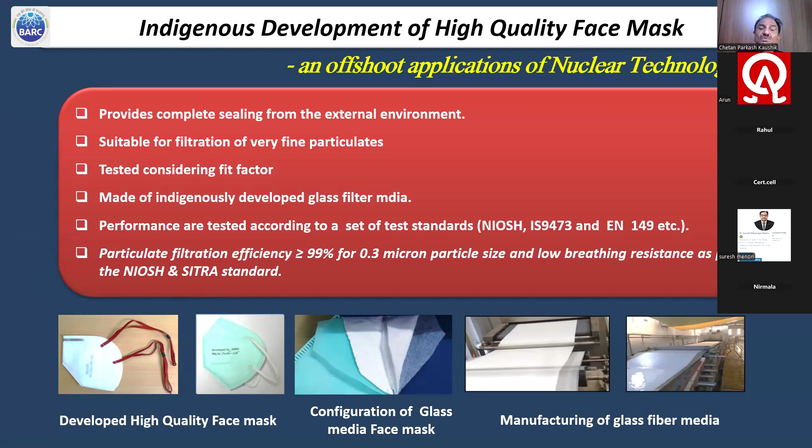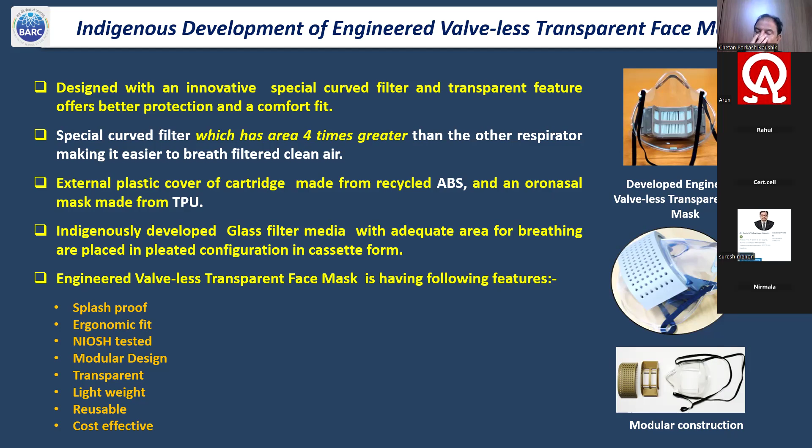For the COVID part also, BARC tried an indigenous mask. Many people, including all of us, used Chinese-made masks which were non-reusable and non-degradable, resulting in a huge volume of non-degradable waste. So this was an offshoot application where we developed a transparent, replaceable mask whose cartridge can be replaced, so that even crimes can be prevented, because the face is visible. With non-transparent masks, you cannot see the face, and this resulted in so many crimes. This was developed and appreciated by honorable ministers, and it was being used.

Artificial intelligence and nuclear energy is a new area where AI helps in nuclear energy by automating processes, so radiation exposure to human beings gets reduced.